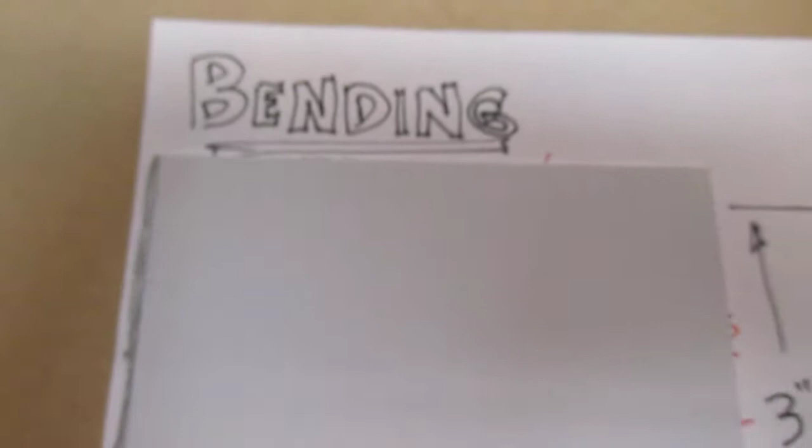Morning, everybody. So we've been talking about bending. Let's see if we can't make this more real and actually see how it works.

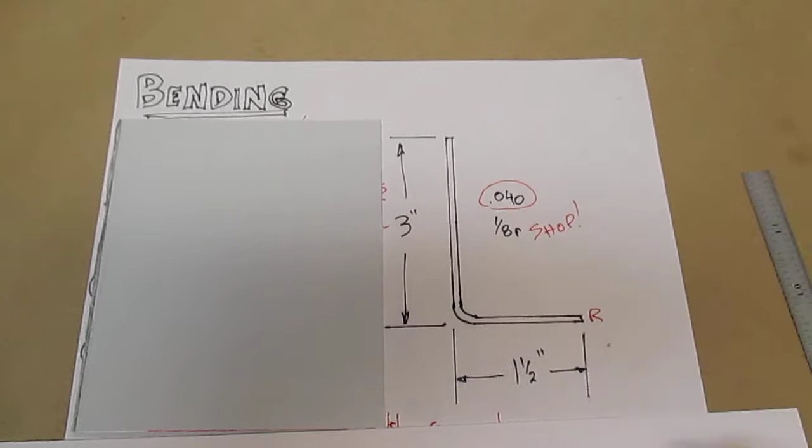If I wanted to bend a piece of 040, so there's my 040 right there, and of course I'm bending it here in the shop, so pretty much everything we've got in the shop for radius is going to be 1/8. So what I'd like to do is bend a piece of 040 over a 1/8 radius and end up with a 3-inch leg on one side and a 1.5-inch leg on the other side. Your typical L bracket.

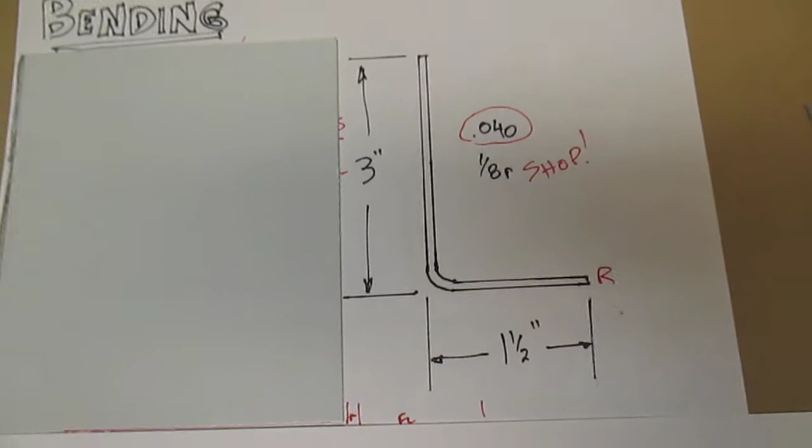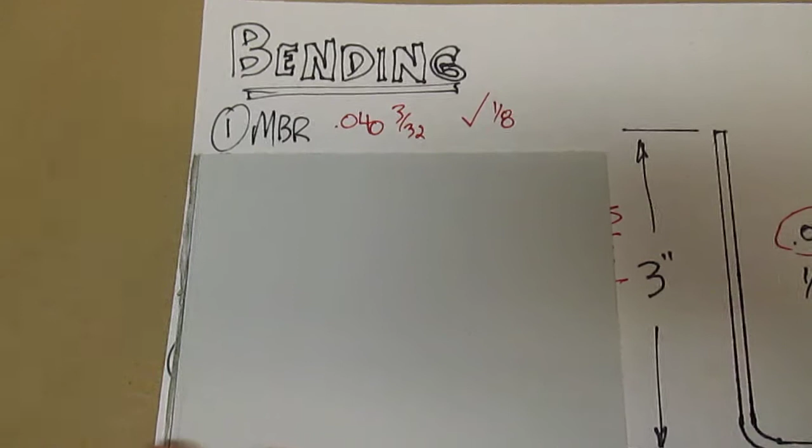Just to prove that what I've been teaching you is in fact true, let's actually do it. First thing we got to do is work our way through the math. First step is, of course, MBR. Can we bend it, as Bob would say? The answer is yes. 040 can bend around a 3/32, that's the minimum. 1/8 is bigger than that, so yeah, we can do it.

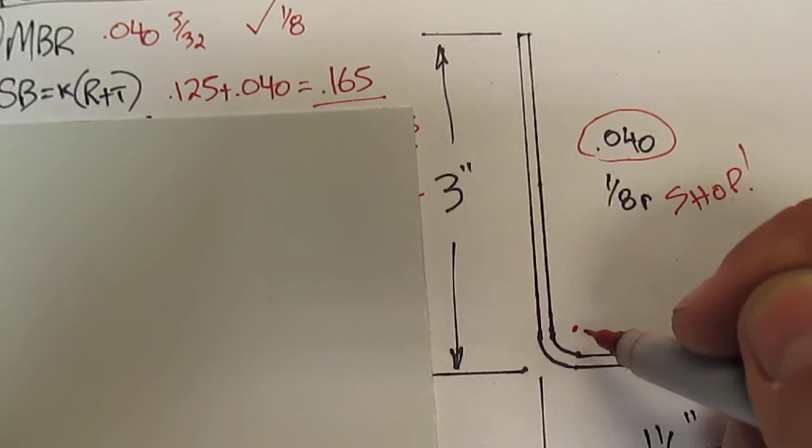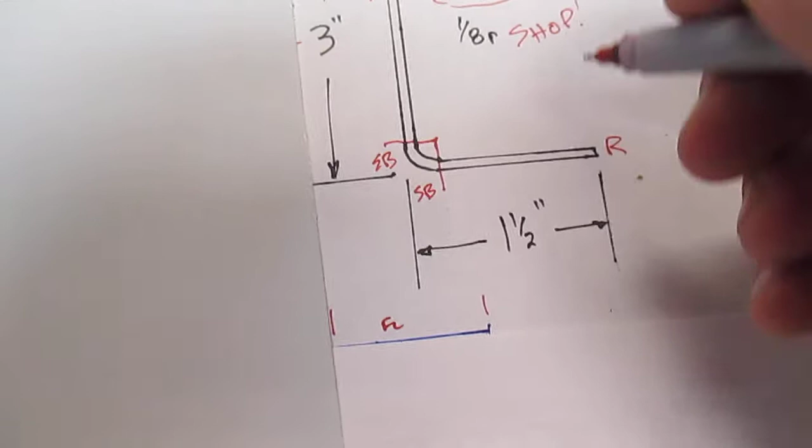Step 2, we got to find out what our setback is. So we find the center of our radius down here, which is where our bending brake is going to go around. And we've got to find that setback in those two little corners there, so that we can know what our flat length is and what our bent portion is. I forgot to label this, so I'm just going to quickly go FL1 and FL2, and then our bend allowance right there in the corner.

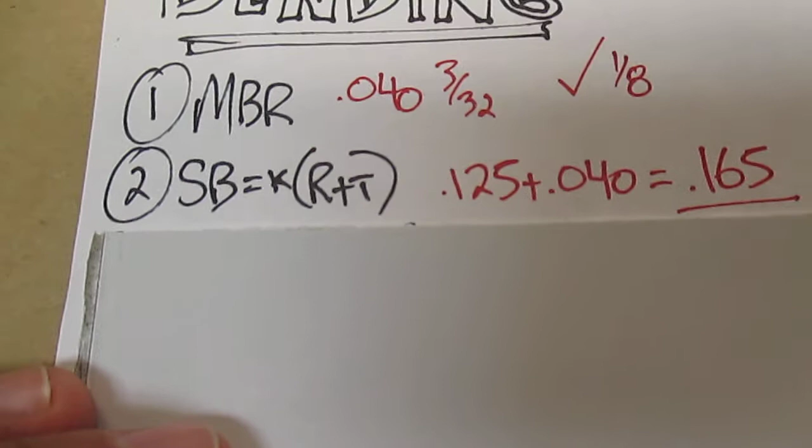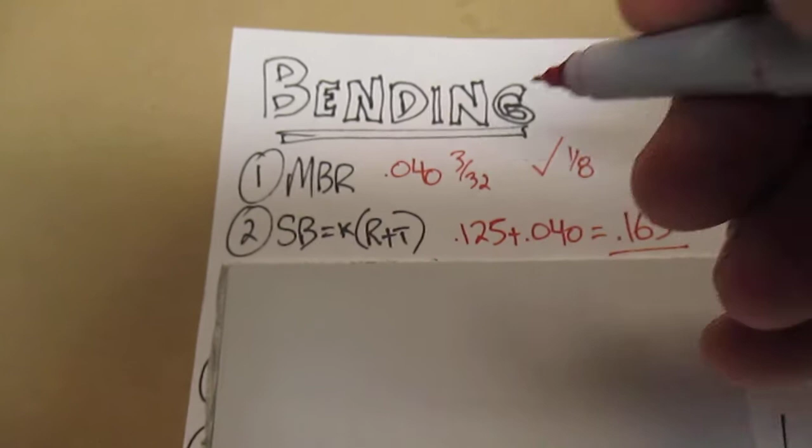So setback, and K doesn't really play into this because it's a 90-degree bend, K is 1. So we go radius 1/8, 0.125, plus thickness 040, R and T. My total is 165. We've done this a couple times.

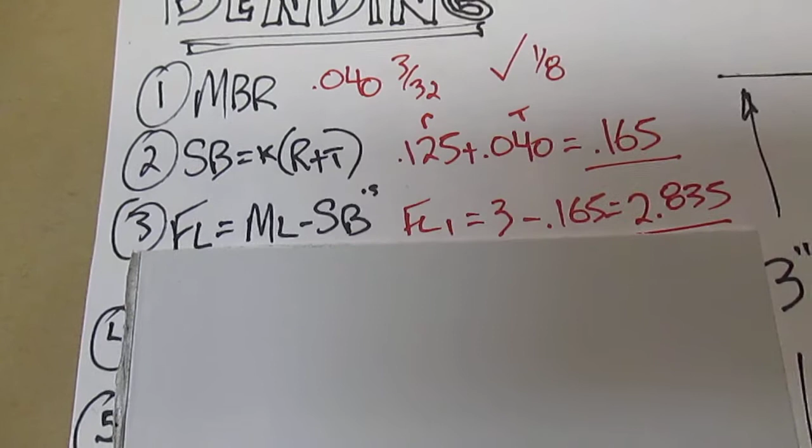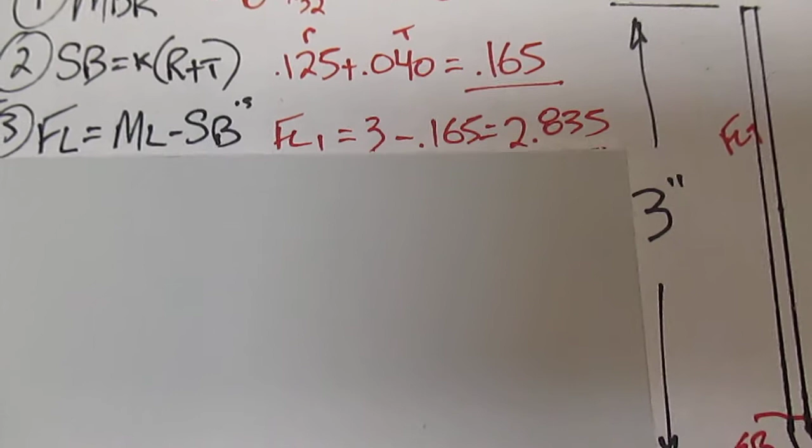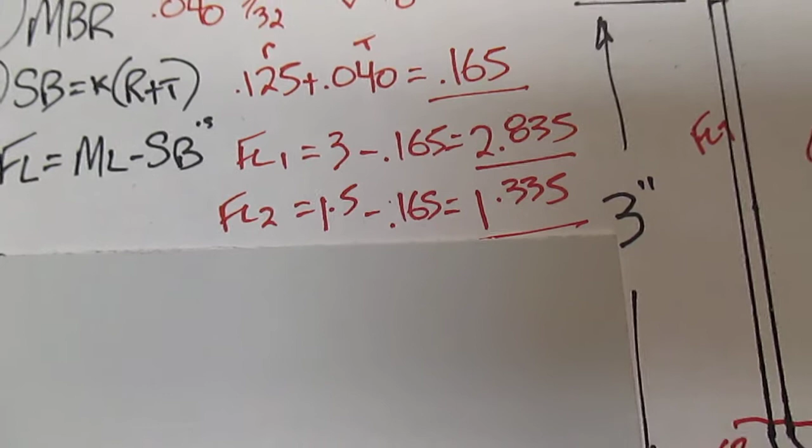The next question is we've got to find out the length of each of the flats. Flat number 1 is going to be 3 inches, minus our setback, which ends up with 2.835 as its length. Our second flat is going to be 1.5, minus my setback, 165, so I end up with 1.335. So what I end up with is my piece of metal with my 2.835 here and my 1.335 here.

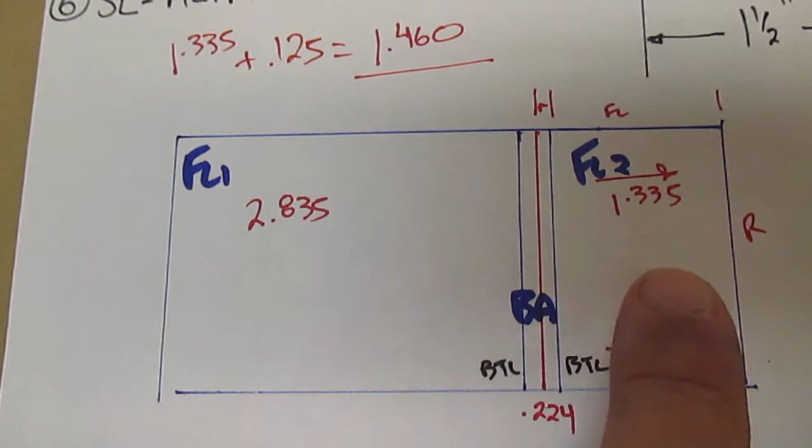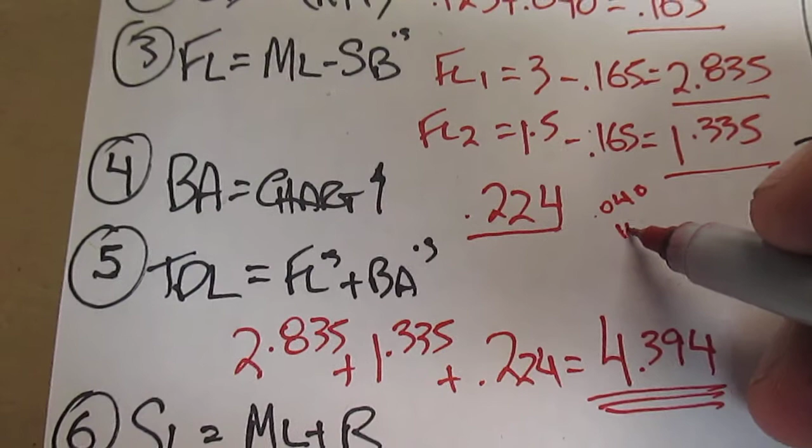Now all I got to do is find that bend allowance in the middle. So what do I do? I go back to the chart and look at the intersection of 040 and 1/8 radius. When I find that, the magic number is 224.

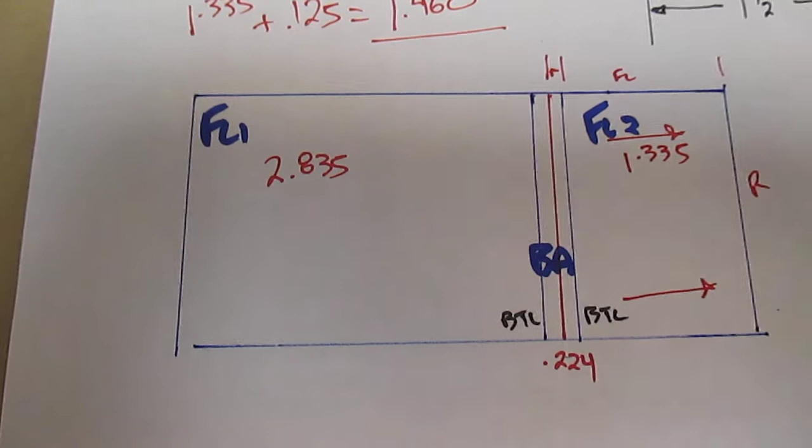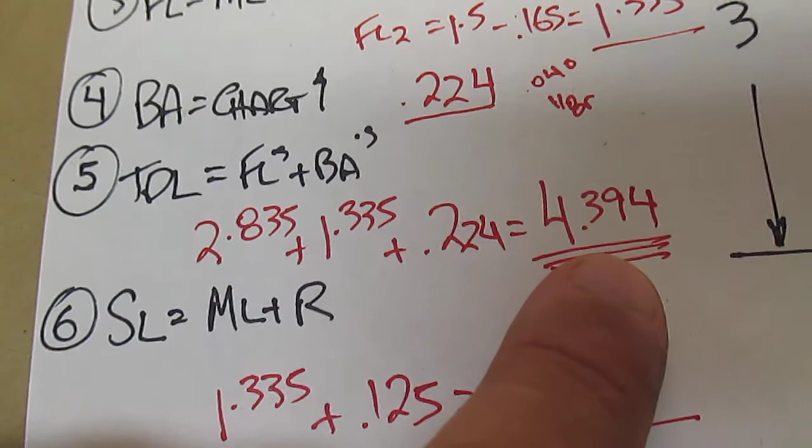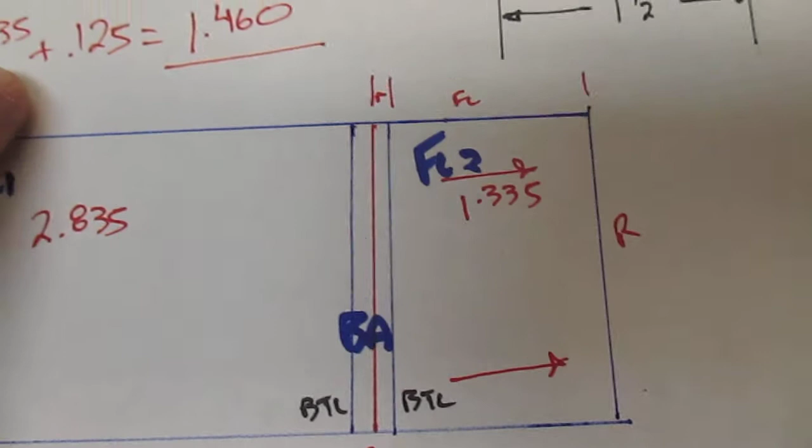So I've got all 3 pieces of information I need: my flat 1, my bend allowance, and my flat 2. Add them all together, and what do you get? 2.835 is flat 1, 1.335 is flat 2, 224 is my bend allowance, for a grand total of 4394. So I need a sight line, and it's going to be 1335 because I chose flat 2 as my reference, and a radius, so 146.

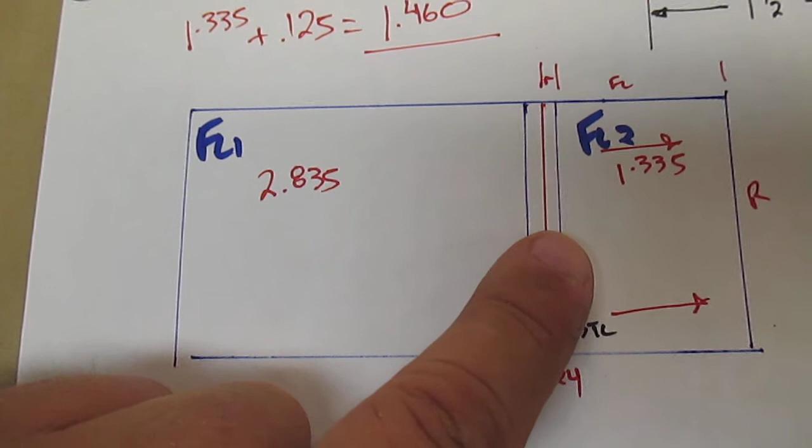I've laid that all out here to show you. There's my bend tangent lines, the beginning and the end of the bend, my bend allowance in the middle, and my red line is my sight line. So what I've done is transferred that all across to my piece of metal.

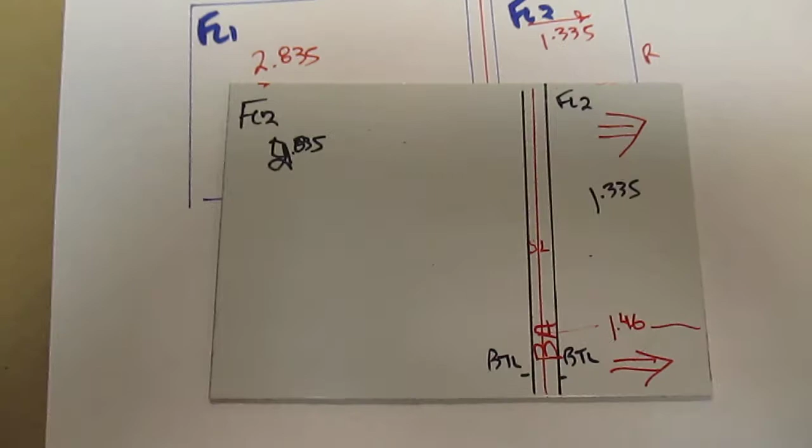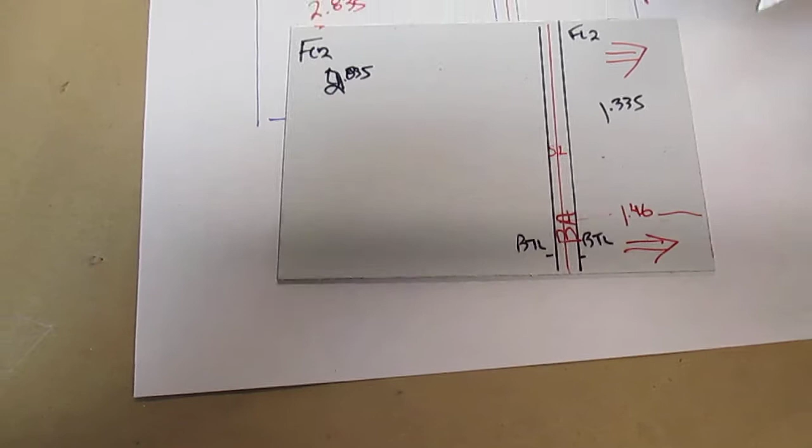My piece of metal, when we measure it, let's see if I can do this one-handed. Come on, let's open up. Here we go. And when I measure it right here, well, you can see that, pretty close, within 2 thousandths of an inch. And again, that was cut in literally 2 strokes of a file and I was there. So there it is.

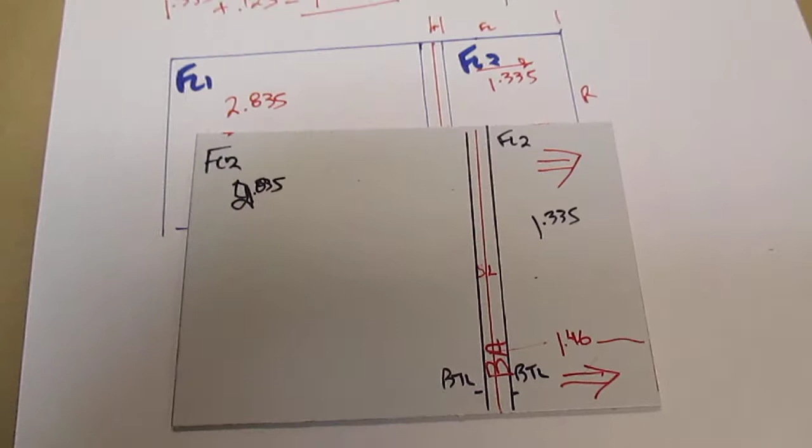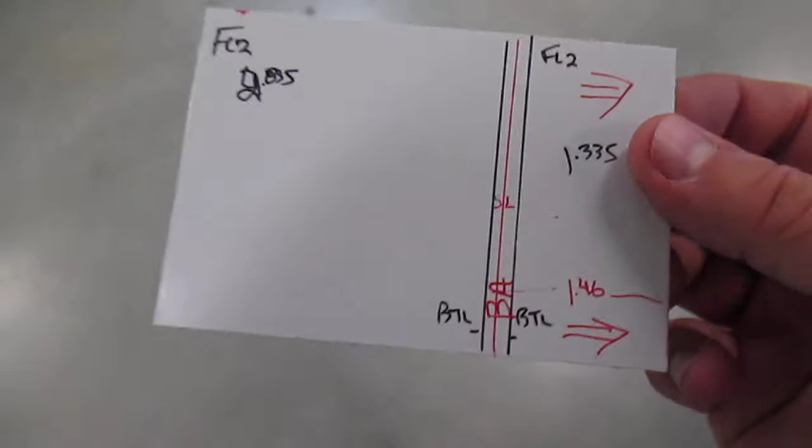It's all set and ready to go. Let's actually see if when we put this in the bending brake it's actually going to work. So standard piece of 040, I left the plastic on. I got my arrows to show which end goes into the bending brake. Let's put it in.

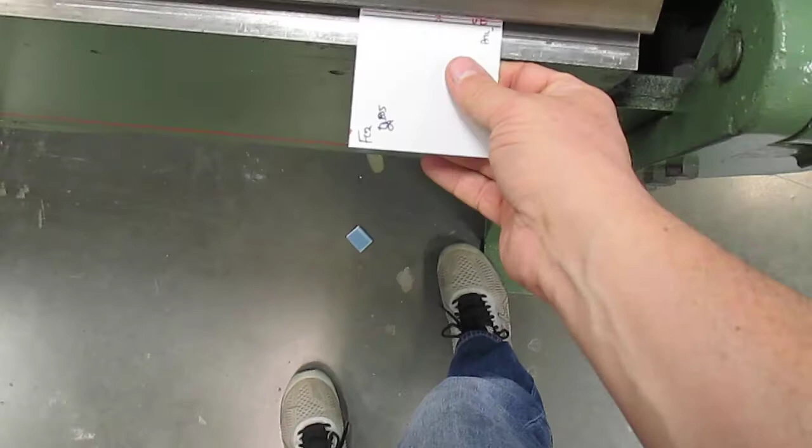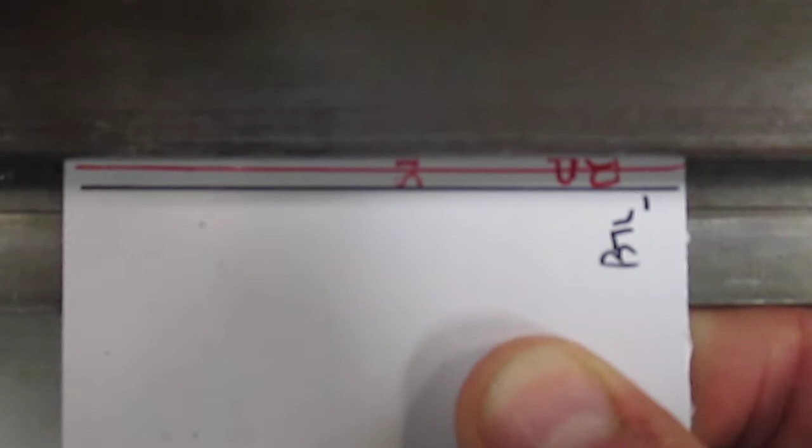So again, here I'm looking from above. What I'm going to do is bring this down close. And then when I look straight down over the end of the bending brake, I want to just be able to see that red line. You can see the black line, you can see the red line. I want that red line just about there. Hold on a second, I gotta pull this down and pray that actually stayed. Did it actually stay where I wanted it? No, not really. Crap. Hold on.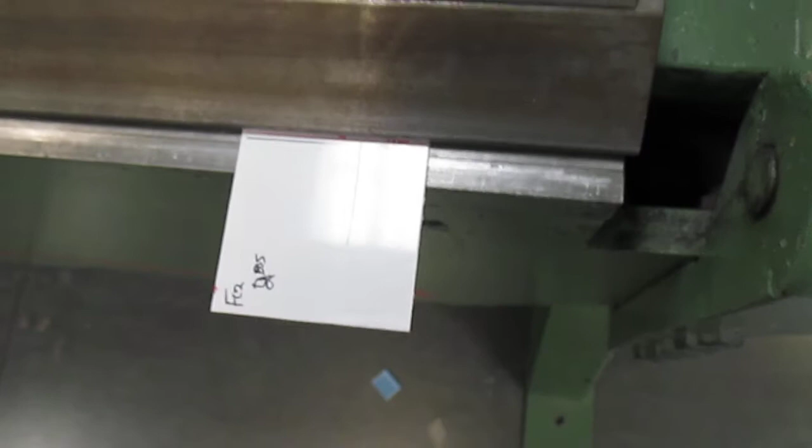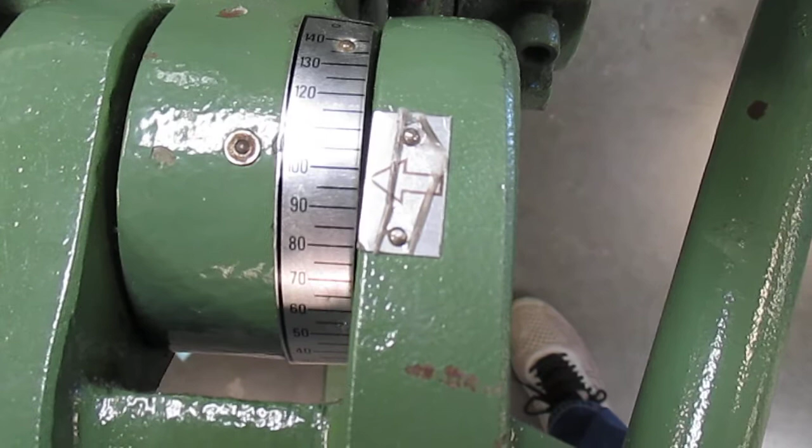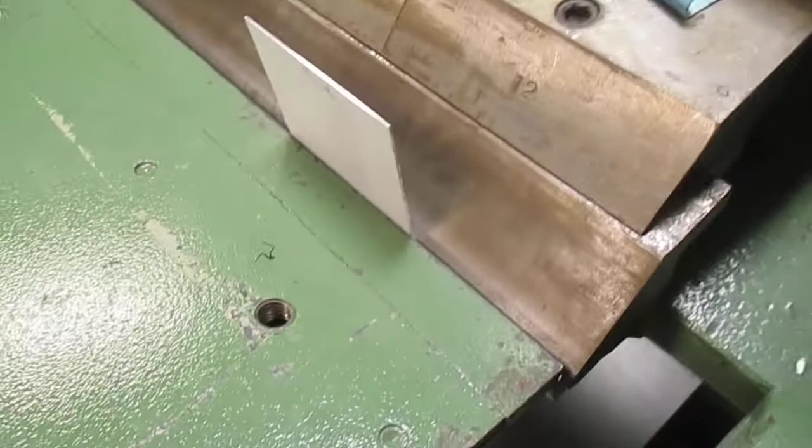I can just barely see the bend sight line. So I'm going to lock that down, and here I'm going to bend to about, there's 90, so there's about 98, 99 degrees. Oh, I got tons of— sorry, don't look at that, because I got the wrong setback in here right now. So I'm going to have to make do here, sorry. Okay, that looks pretty close to 90, maybe just a hair off. Let's pull that out. It looks pretty close to 90.

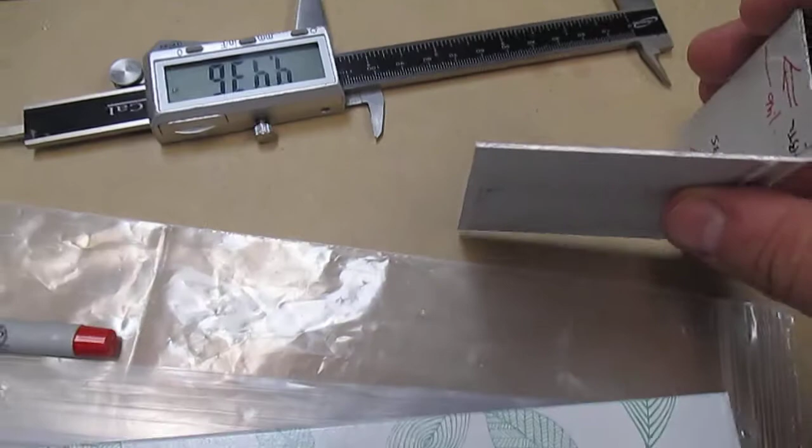So now the question is, did it end up bending right? Let's go have a quick look. I'm taking it back to where the vernier is, or the caliper is. Hold on a second here. Put it there. Okay, let's see here.

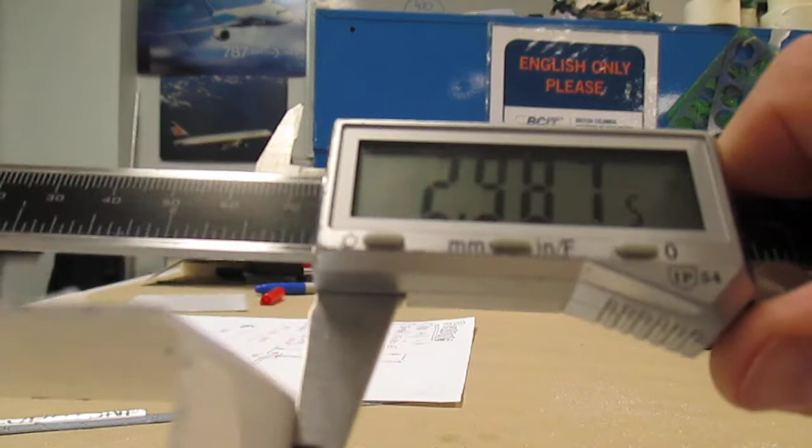Okay, like that. And what are we going to do? We're going to take this and, oh, can you see that? Yeah, actually you can see that, I guess, not too bad. Let's have a look. Oh, see, that's within, it's 10, 12 thousandths out. So, and again, that was probably just because, right there. So yeah, about 15 thou out.

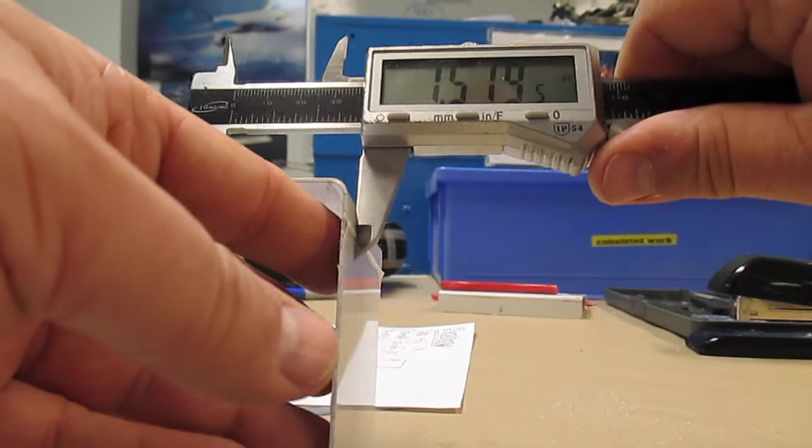And so how about this side? How does this look? Yeah, and that's about 18 thou over, because the other side was shy. So that's almost dead on. So probably a little bit of an angle, but it's still pretty close.

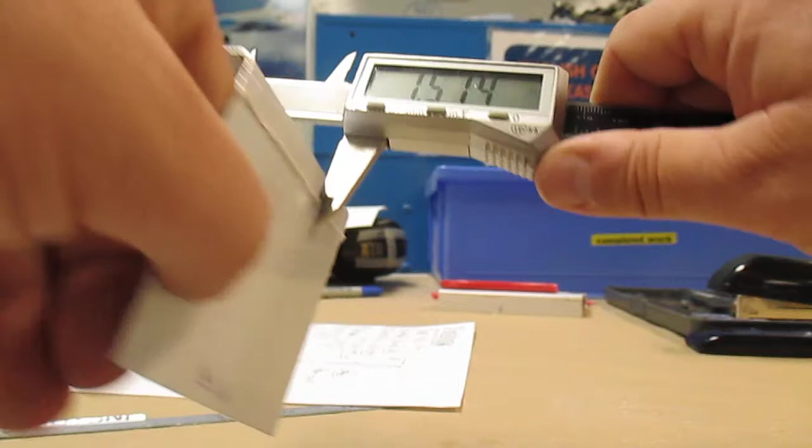And so within spec easily, and so we can see where the math actually works to give us our final product. And so there it is, and there's a practical example. Let's do some more. Where do we go?